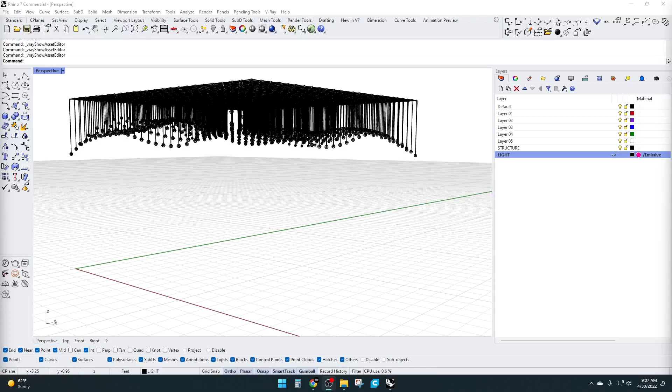My name is David Capetti, and in this video I'll be sharing how to create this suspended light design that was created here inside Grasshopper. At the end, I'll be showing how I turned it into something like this.

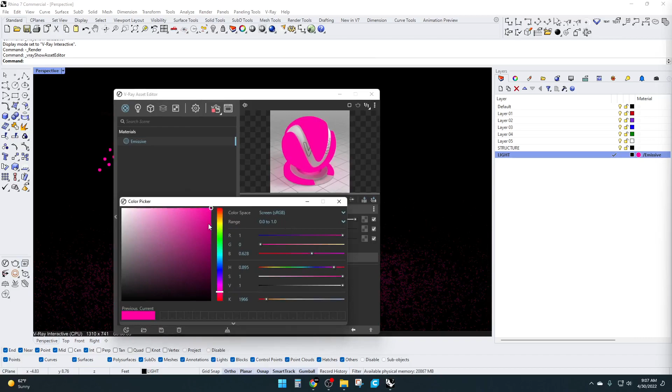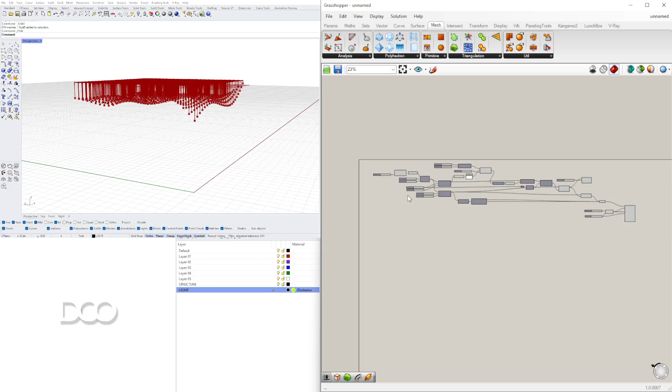We can change the color, we can change the design around, so that's one of the options I baked in. If we go to shaded mode and hide everything, let's go back to the design. Here you can probably see it's a straightforward design. I'll be doing all of the steps in detail, going over how to take this design from a randomly generated surface that we can add and remove points from.

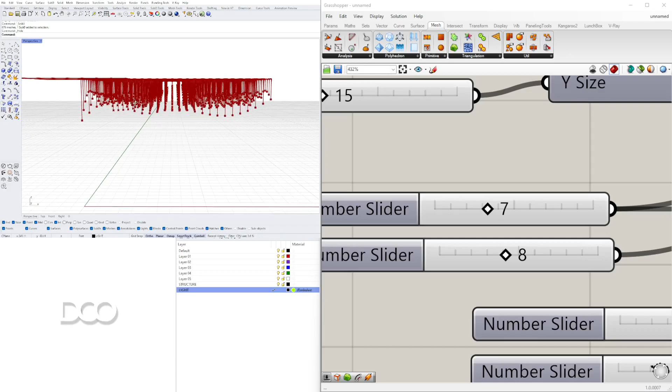Then we created another randomly generated set of points that was projected down, and that was used to create the suspended light design. I'll be going over all of these steps, so if you have any questions, make sure to let me know.

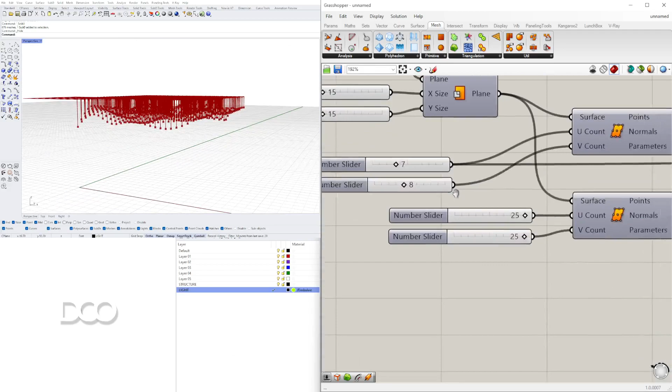The first thing we're going to do for this exercise is notice that the units I'm using are going to be in feet. Starting with a brand new project, we're going to bring in a plane surface, but honestly this could be anything. For the most part I'll be using the plane, representing a surface you can bring in, so you're not limited to it being a rectangle. It could be any shape, but for now we'll use a base rectangle.

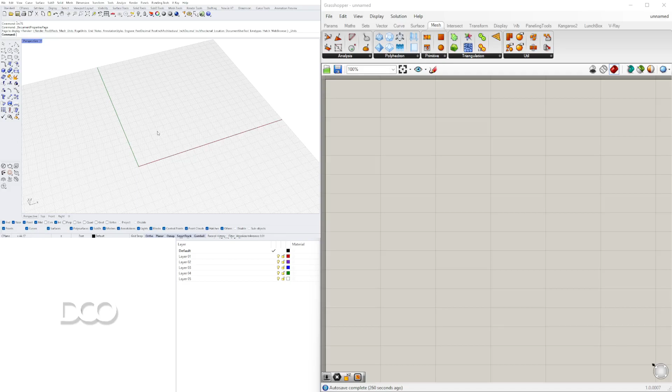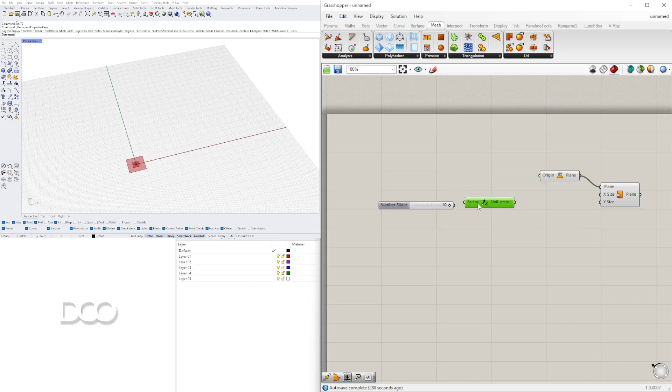Let's go here to a plane surface, and on the plane we'll go X, Y plane. We can even move this plane up—let's say if it was off the ground by 10 feet, you can say 10. Construct a point here, having this be 10, a unit of 10 up.

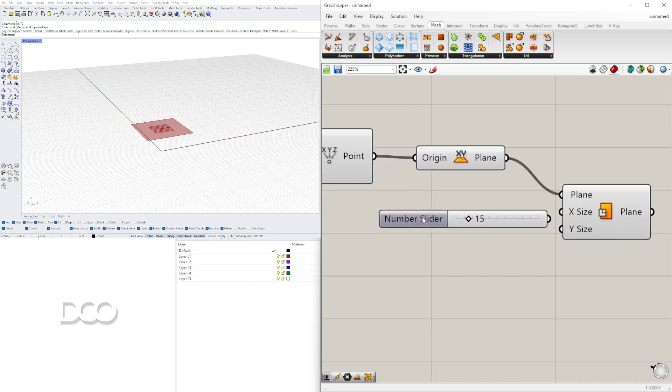Now what we're going to do is plug in a size for X and Y. Let's go here to 15, so it'll be 15 by 15, and we can always change this around. I'm starting with it being a little bit smaller, but the cool thing about this is we can always change the slider and increase the size.

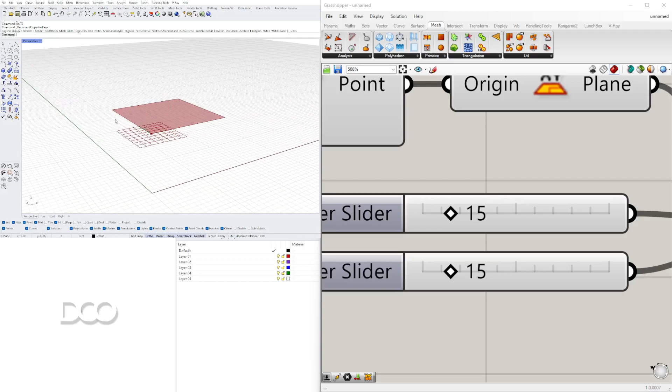Next thing we'll do is take this and subdivide it using points. There are different ways to subdivide this—the two that come to mind are surface frames or divide surface, which will give us a U and V point count right on that surface. Now let's change the U and V count to a number of 3, and then less than 15, so we have a slider from 3 to 15. Let's change this around a little bit.

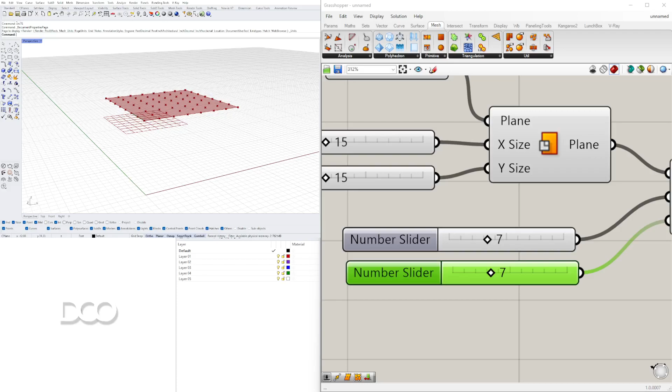Okay, so now with these points, we are going to move them down randomly. This is going to give us kind of a topographical surface that's wavy randomly, and that will be the surface we'll be projecting the other set of points onto. Now that we have this, we want to move these points down randomly.

So we need to bring in a move component, and the motion is going to be unit Z, then negative, for it to come down a specific amount. Now let's plug these points in, and we see that it moves it down by the same amount. One thing we need to notice is that the points will probably be flattened because it's going to organize the information that way.

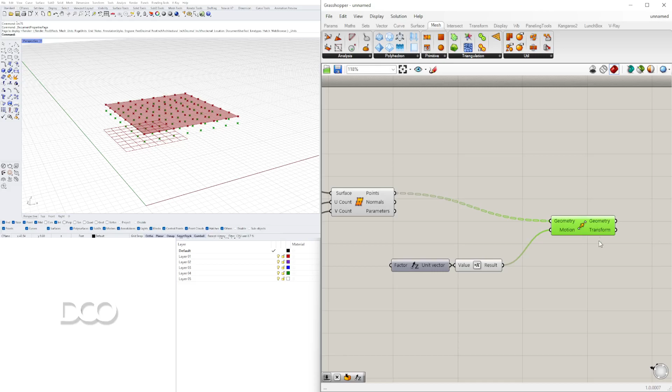The thing that comes to mind is that we need to know exactly how many points we have, so we can generate the exact number of points randomly. So what I'll do is take list length, which will give me the exact number of points we have. Under the list length I'll go to quotation marks, and now we can see how many we have—we have 64 points. The reason that's critical is it's going to be one of the inputs for our random number.

So let's go ahead and move this over, and we're going to bring in a random component. This is going to generate a random number, and for the set of numbers, this is how many total values you want. So that would be 64. I can obviously skip this, but it's more to show you how many points we have.

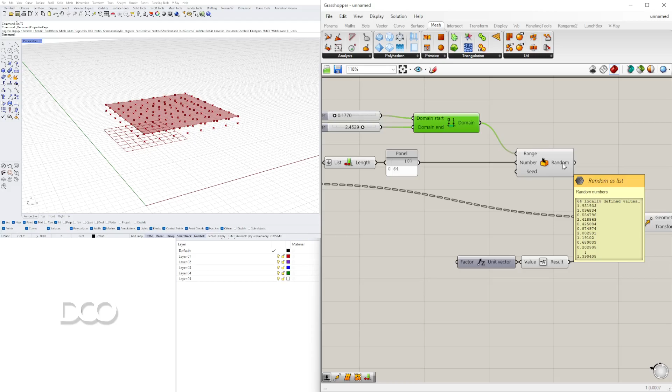Seed is going to be a randomized option, and for range we need to construct that. I like to use construct domain, which gives us a start and end point we can plug into the range. We'll start at 0, go 0 less than 3.5000, and copy that one twice. It doesn't matter which one we use, as long as one is different than the other. Now we can see we have 64 values, random between 0.1 and 2.45.

The reason we want that random number is because here we only have one value plugged in, so it's kind of static. If we plug in a slider here, it's only one number, one value that changes. So now we're going to bring in that random number. I kind of like to organize it a little bit here - sometimes I get a little carried away. Let me plug in now into the motion, which is Z down.

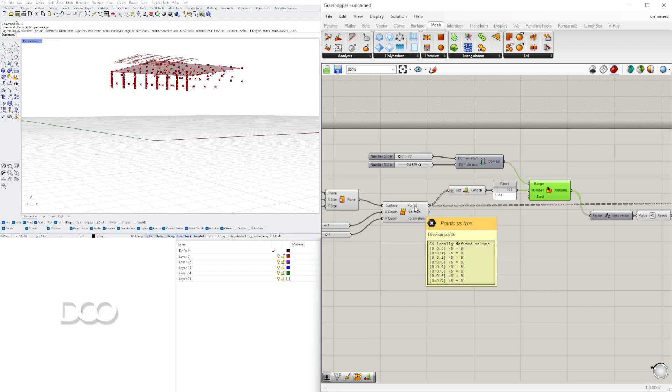We're going to plug in the random values. Now, the reason the numbers need to be flattened is because it generates 64 numbers, and here it's bringing them out in sets. So if we go to flatten, that'll take care of the issue. Now let's disable the preview - actually, no, we can leave it here.

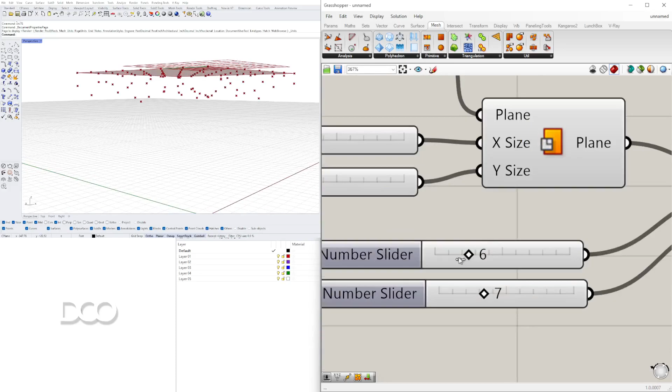As you can see, we've created some random points moving down, and we can change the number of divisions that we have. For this, we can change the upper and lower number, so we can lower this, and we can also make it be the same. So this takes care of creating those first random points.

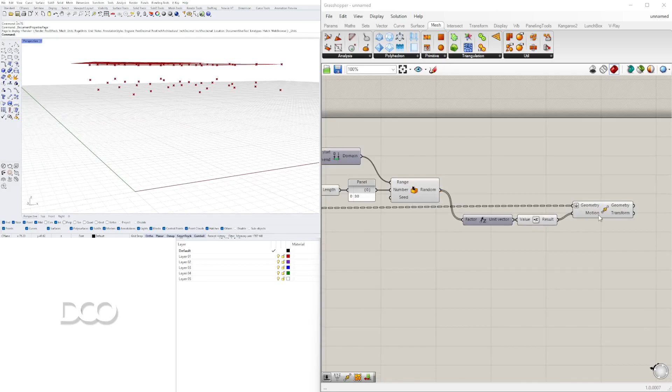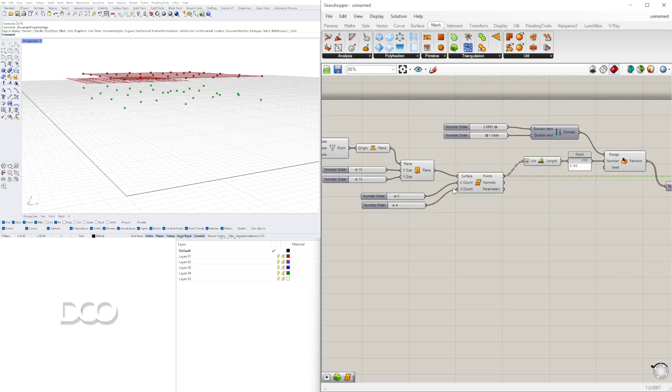Now we're going to take those points and plug them into a component that will create a surface through these points. We're going to double click and bring in surface from points. There are other components we could use for this, but I think this one gives us the best result. So we'll take these points and plug them into the points input. For the U count, we have to go down here where we see the U division.

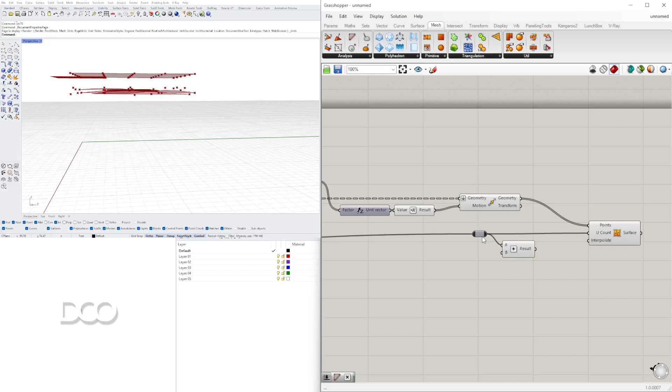We're going to plug this in, but you're going to see it's not going to work - or actually it does work, but it gives us an issue. We have to do a +1. So I use a relay here, bring in a +1, and that fixes the issue. It's because you have to add 1 to the U count to account for one of the sides, and that takes care of the issue.

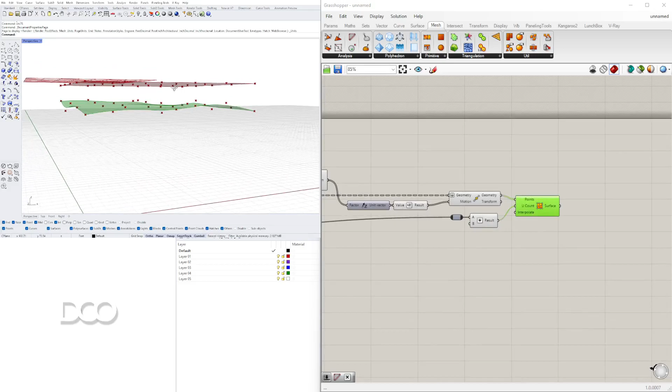So with this surface, now you see we have this kind of undulated, wavy thing that we can use as our base surface to project those random points onto. Or technically there wouldn't be random points, it would be the same as these, but with this you can see - let's lower this.

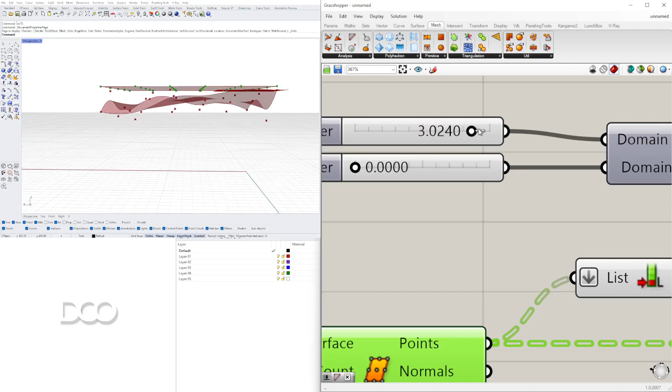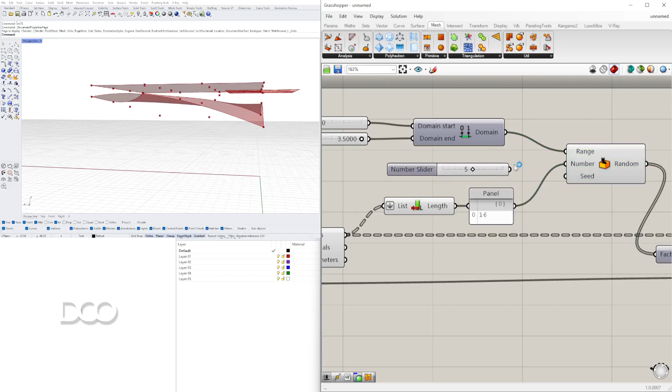I'll be changing how many subdivisions we have here. Then under this one, we can change the direction if we don't like that. And the seed is going to give us more random points or more random solutions. So we'll go to 5 and then plug in. Okay, something like that looks good.

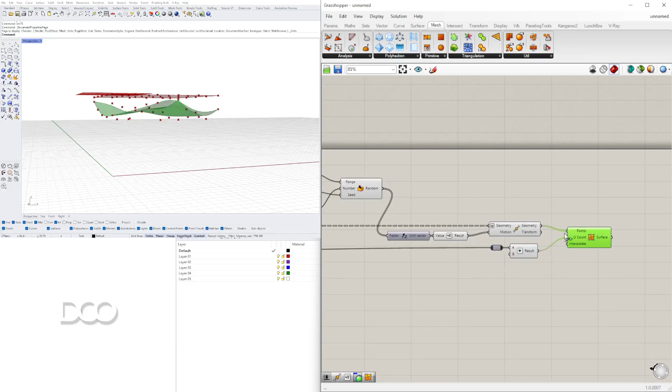So now with this, we're going to use this as our base surface, and we can basically hide some of these points that we don't need. We also have this base plane - you can probably hide that also.

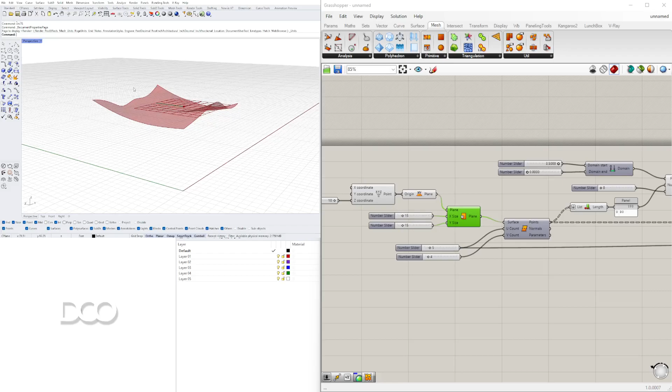Now we can move on to creating the random generated, or not random generated, points. They're going to be the same grid points, but then they're going to be projected down to this random generated surface. What's cool is if we don't like it, we can always change it around and see if there's a better one, or just using the U and V count here.

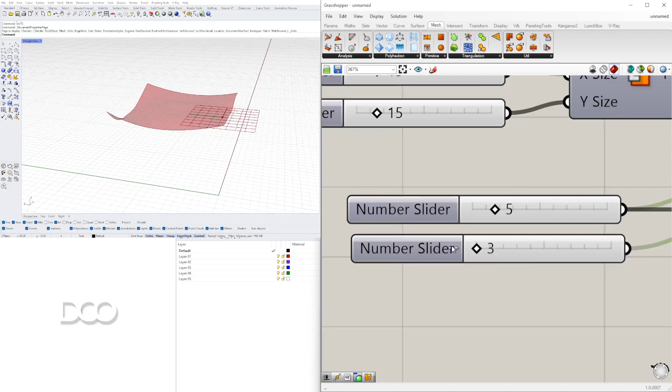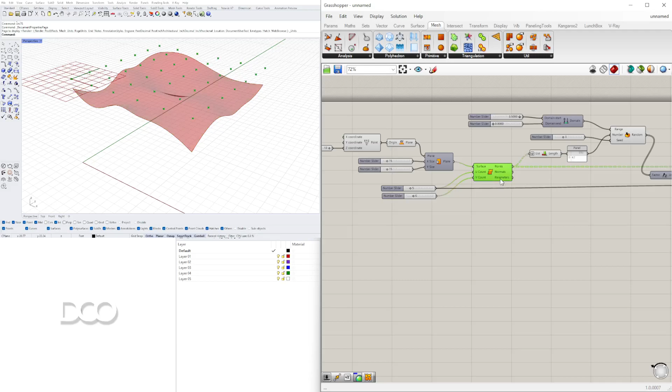Okay, cool. What we'll do is take these points that are generated on that surface, and we're going to copy it. Now we're going to copy these two sliders and plug them into here and increase the count.

Now we'll disable the preview on all the other ones, and let's increase here the upper limit of our subdivisions.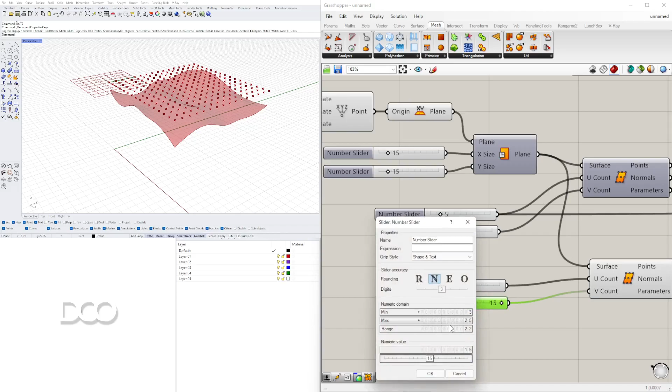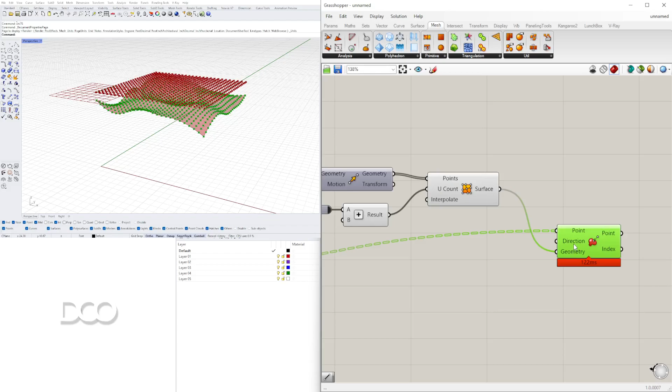Now we can take these and project them down onto the surface. So we'll go to project point and plug in the points into the point input, and go all the way over here and bring in that surface into the geometry. By default it says 0, 0, -1, which means it's going to project it down, so it kind of takes care of it for us.

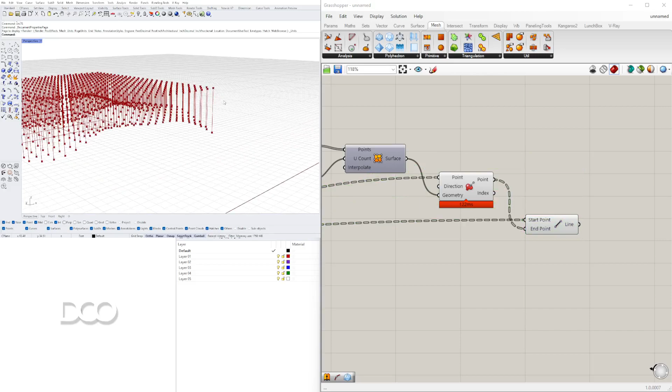And the idea now is that since we have that set of points we projected down onto the surface, we can create a line segment between those two. These down here would be the end point, and then the start point would be these. Since they are set up as kind of grafted sets, it actually connects each point from that one down to this one.

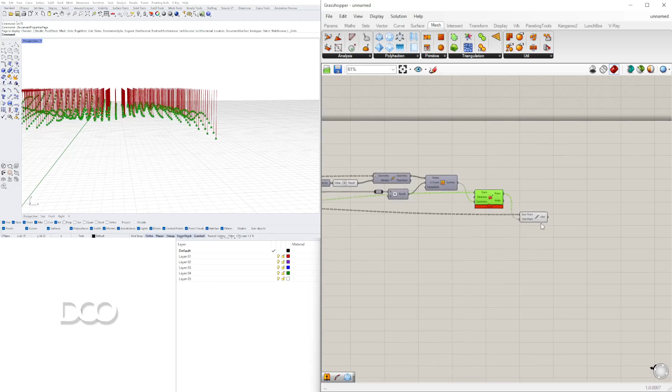I'll disable the preview on the points up here. And as you can see, now you're starting to see the shape of the original surface here. One of the cool things is we can always change this around to get a different solution.

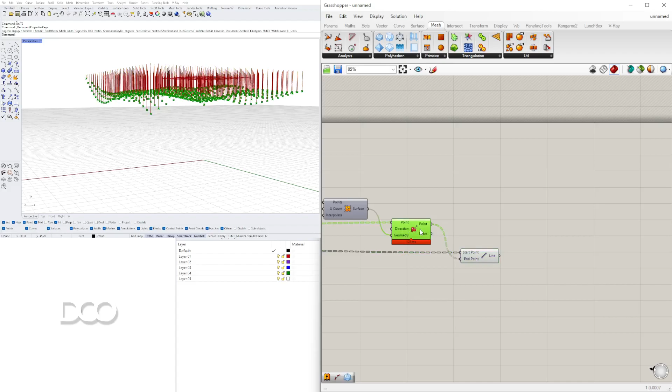And to keep it light with using, since we have so many subdivisions, and the more subdivisions we create, it's going to get super heavy, we want to take these points and create a mesh.

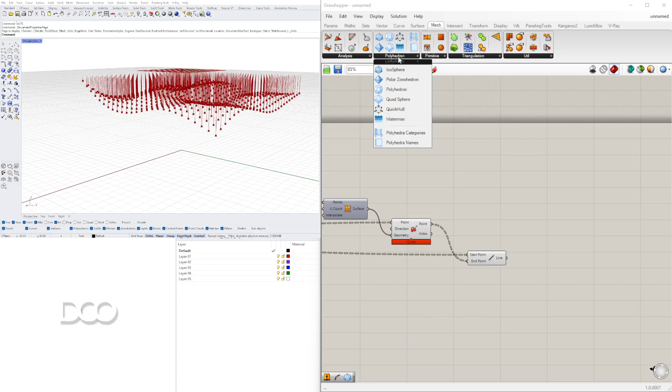So we'll go here to primitive, we can go to mesh sphere. But if you do have the polyhedron plugin installed, you can use the icosphere, which is the one that I'll be using. I'll plug in the points into the plane, and the scale will decrease to something like 0.1 or less.

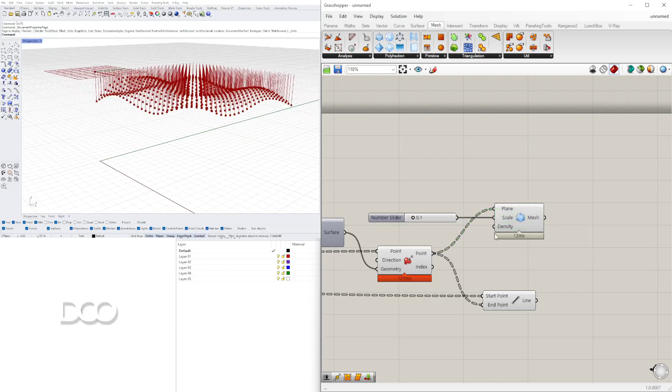And of course, we can always take this and do a point attractor or something like that, where we can change the size of all of the lights and stuff like that, but that's not the point of this. The point of this was to show you how to create this really cool suspended light system with a base random surface and then this generated grid that's projected down.

So lastly, to end the tutorial, what I'll do is show you how to create the top frame and how to connect it to these, so you can have basically that suspended light system with some kind of structure to connect it to.

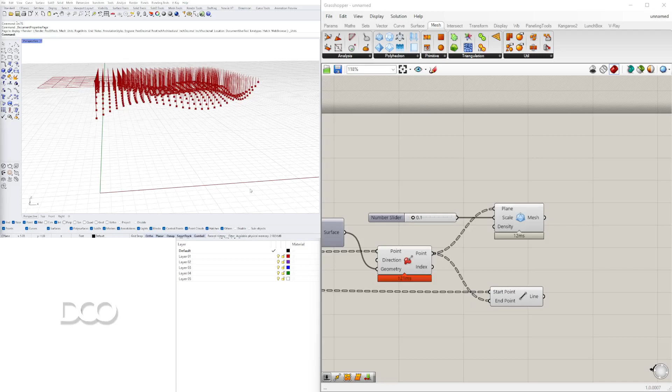So what we'll do is go to the points that were generated up here, which would be these, and construct that grid. So we take those points and bring in the Delaunay mesh, which I always have a hard time saying, and I don't know if I'm saying it correctly, but either way, the points will come in grafted. That's when you see that dash line.

So we'll flatten the input. This way it brings them all in one big list, and it then calculates the points and how close they are to each other and generates this.

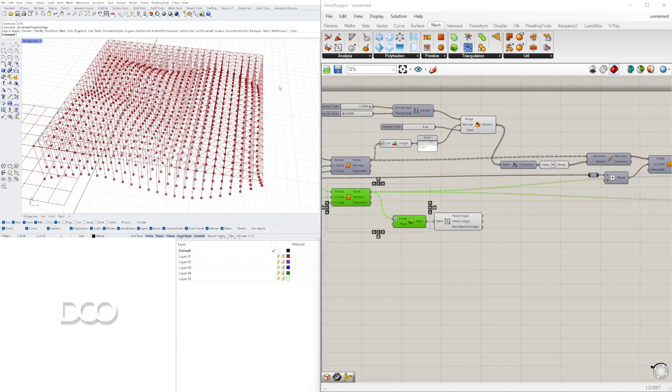So what we want now is to go to mesh, edges, so we can extract the wireframe using this triangulated look. Now, if that's not the exact look you're going for, there are other things we can do to subdivide it, but I actually think that looks pretty cool.

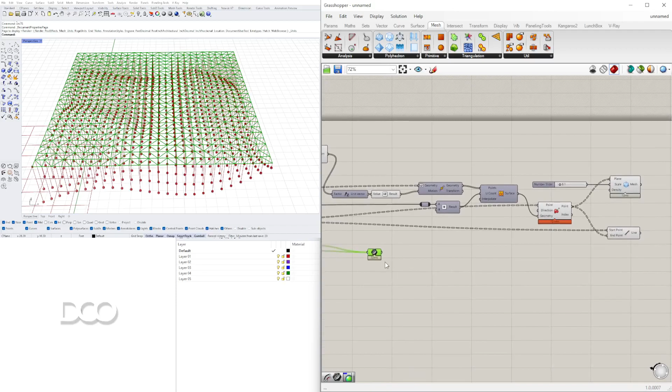So what we'll do is take this and go to curve, and just bring that into one input. That's not really necessary—we can technically just plug all of that in, but sometimes it's cleaner to do it this way. So I'll plug all of these in, and then flatten the input. This way everything comes in at once.

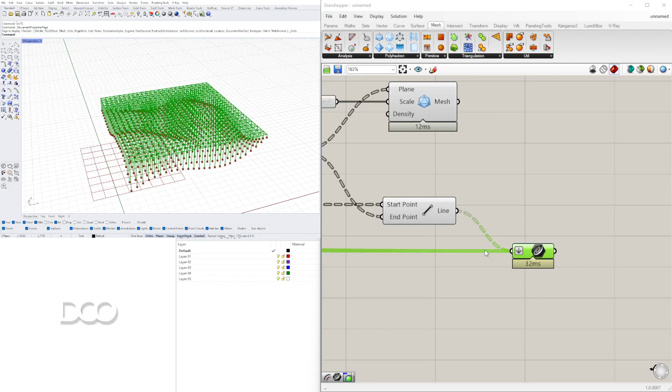We have 2601, and creating a pipe for so many curves would actually make it really laggy. What I've noticed that makes it not so laggy is using multi-pipe sub D, and that actually helps a lot because it makes it all one, and it's really light—so if we make any changes on the script, we'll see them update pretty quickly. It also looks really nice in the connections. So let's go ahead and plug that into input.

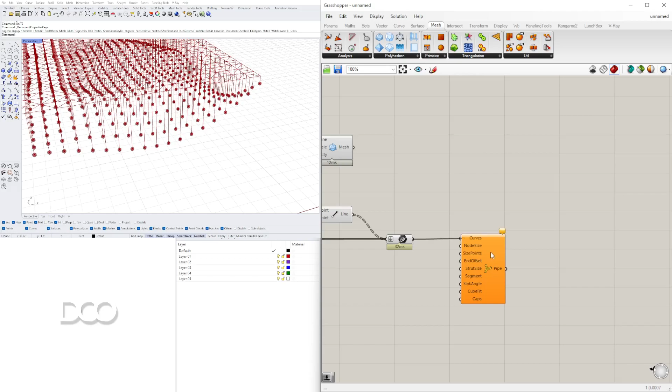And it's obviously way too big here. So let's go to cap round, and let's decrease the size of this.

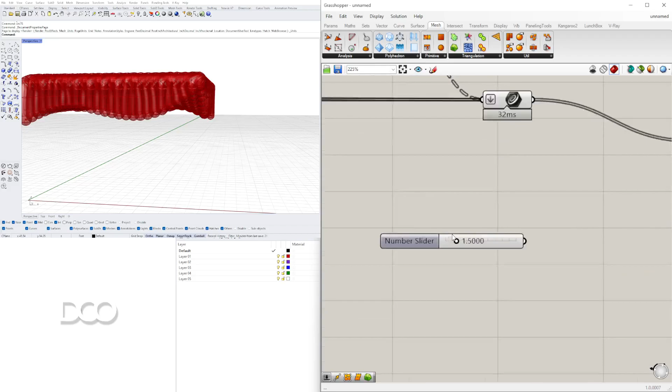So I'll do this every time, and it's because it just kind of works for me, but I'll show you. I'll create two numbers that are the same, like 1.5000, making sure to have a lot of decimal points, because sometimes I'll have to go to a low number. I create two of these.

And I multiply one to the other. The reason why is because there has to be a proportion between the two for it to work correctly, from my experience. And this is what I do.

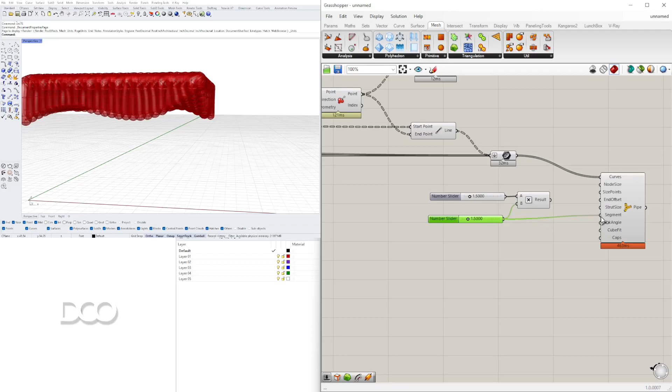I plug this into the strut size. I plug this into the node size and end offset. And you're going to see that it kind of gets really crazy. So we'll have to decrease all of these, but we'll just have to decrease this one, and you'll see that it'll start to work.

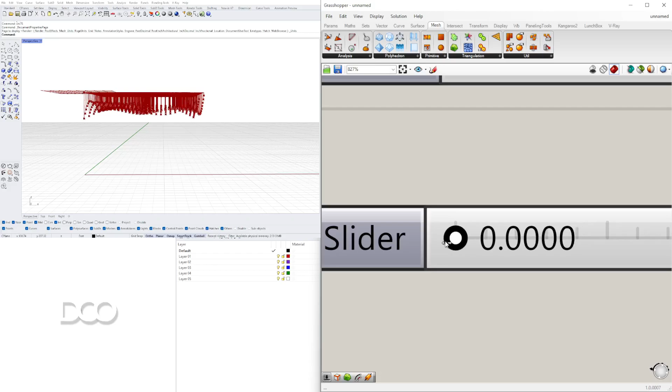So this is why sometimes we have to go to a low max number, so we have more slider to work with, if that makes sense. And then we'll do the same thing here.

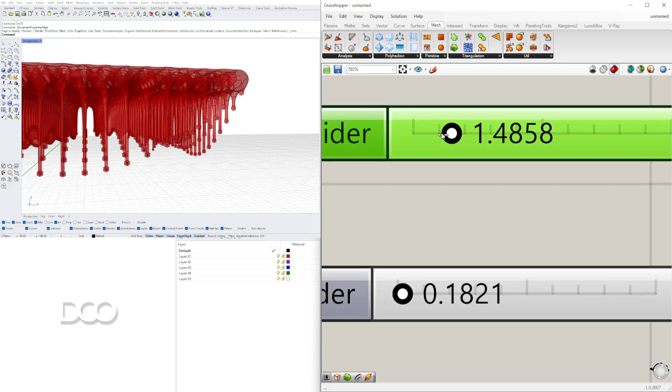I'll do the upper limit to 2.

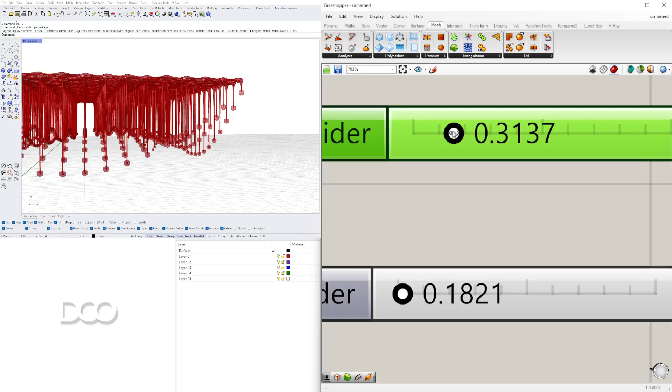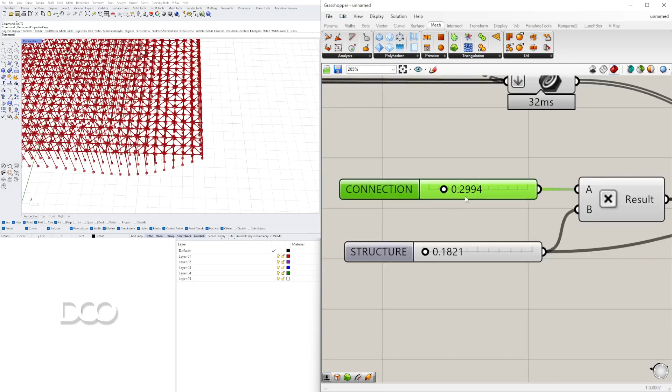So depending on whether you want the connection to be larger or not, that's where you do this larger one. This one is going to be connection, and this is going to be structure. And the reason why I say that is because we need to decrease this number more here.

We'll decrease this one.

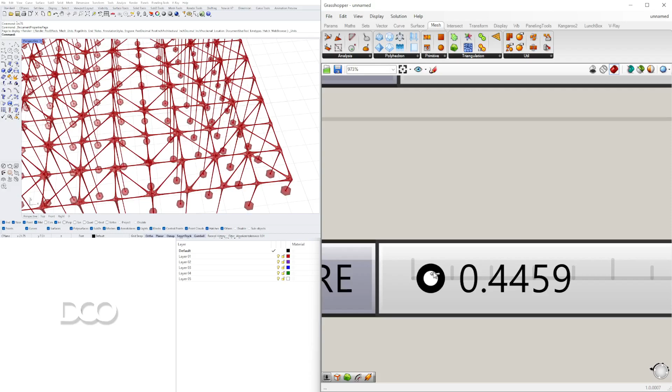So that kind of creates a wireframe for that entire design. And so let's go ahead and bake it and take a look at what it looks like here.

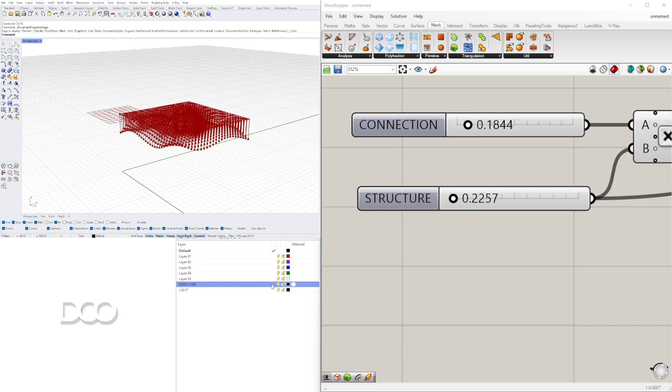So I'll go to a new layer, call this structure. And then I'll hit tab, creates a new layer, and we'll call this light. I'll make my structure layer my current layer, and then I'll middle click and then bake.

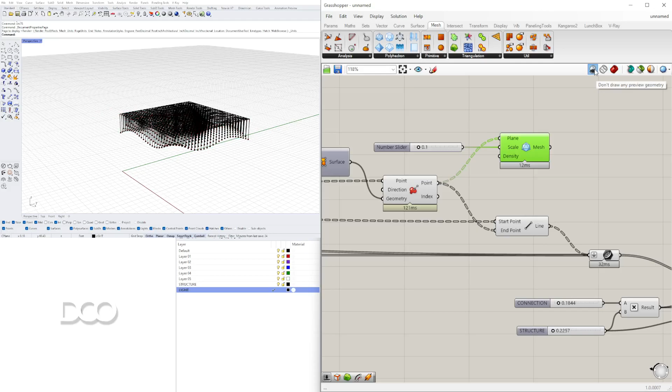And I'll do the same thing with the light. I'll make that my current layer, go to the mesh, select it, middle click, bake. Now I'll disable the preview here on don't draw any preview geometry. Let's take a look at this.

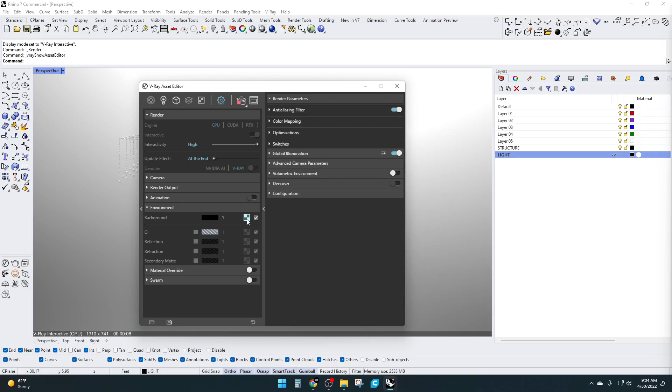Now go ahead and turn it into V-Ray Interactive. And I'll see if I can turn off the environment. And then I'll go to the light here, bring in a new material, an emissive material, and plug that into the light.

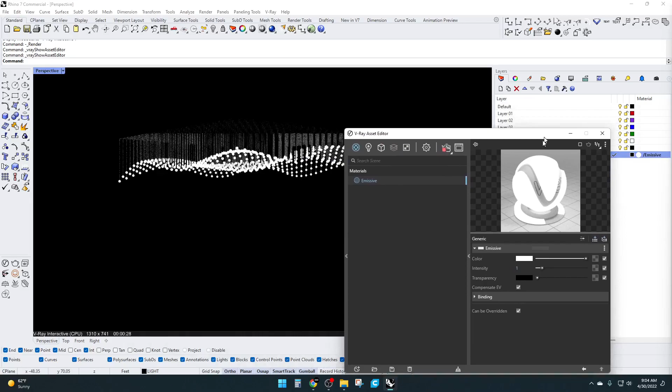Now let me see if I can bring in a ground plane. And it says automatic, so I'll change that from automatic to 0, because we know that it's at 0.

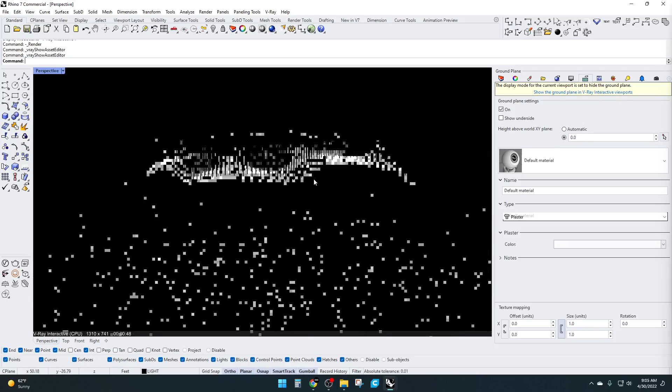So that's a bit of what that looks like with the render. And we can of course change colors here.